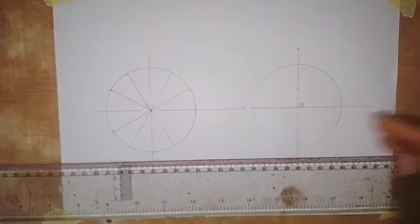So we are dividing this circle into 12 equal parts as we have here. Then we are not dividing the other one into 12 equal parts, you'll see what I'm going to do here.

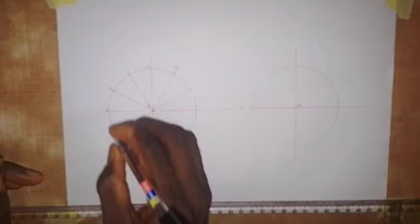First of all, we have point B at this point, so I'm going to call it point B, and then point 1. So this is B1, and this is 2, this is 3. Let's say this is going in anti-clockwise direction. So this is 4, 5, 6, 7, 8, then 9, 10, 11, and 12.

As we are told that the two circles rotate in opposite directions, one is going clockwise and one is going anti-clockwise. So this one is going anti-clockwise, while this one will be going clockwise. That's what we are going to do.

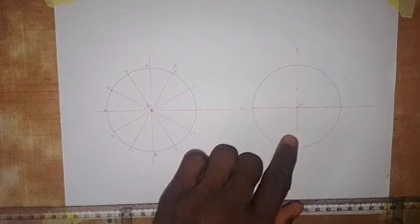As we have located point B here on circle center A, we need to locate point C on this circle center D. But we are told in the question that the length of the connecting rod BC is 130 millimeters.

So to locate point C, we take a measurement of 130 millimeters with the compass, stretching it to this point here. So here we have 130 millimeters. I'm going to put the pinpoint of the compass at point B, or point 1, then make an arc on this circle center D. We keep this 130 millimeter setting, as we are still going to make use of it. So here we have this point to be point C, or C1.

Alright, so we have this now. We are going to draw the connecting rod just to connect B and C together. So we connect B1, C1 together. That is going to give us the connecting rod.

So we draw a line from here to here. This is the connecting rod. Then we are going to make line AB1 a thick line. Then this line CD, this C1, we make it a thick line like this.

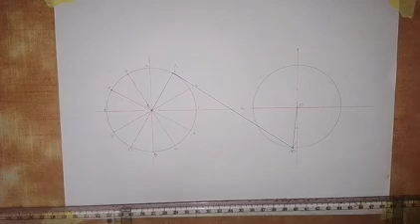So we have this, and as the question says, point P, whose locus we are to plot or draw, is 25 millimeters away from point C. So to locate point P1, we take a measurement of 25 millimeters. From here to here, this is the first 25 millimeters. So here we have this point. This is point P now. So I'm going to write P here.

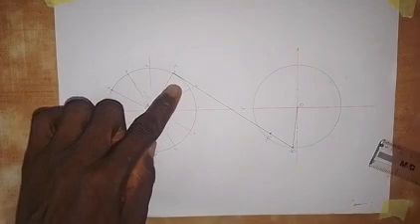The next thing we are going to do is that as this one is going anti-clockwise, while this is going clockwise, we have to go in this direction. So what we need to do is take that 130 millimeters, as I said, and put it at point 2 here. That is point B2.

Then I'll make an arc here on this circle. So this is another point C, the second point C. So what we are going to do now is draw a line from this point to point 2. So we join them together like this.

Then I will take a measurement of 25 millimeters from this second point C here. So 25 millimeters from here, so then we have this point. When you are doing this kind of work, take your time. It's not something you can rush. You can't draw all the lines and then get the point - that is not going to work. So you take it and do it one by one. This is the second point P now.

Next, with the same 130 on the compass, we put it here at point 3, then make an arc on this circle. This is another point that we have here. We have to join this point together with point 3, so that we can locate the third point P. We join this together like this.

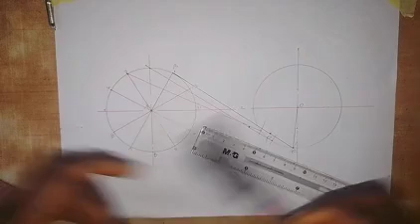So then I'm going to take a measurement of 25 millimeters from this point C on this line, so we have this point. This is another point P here. I'm not going to keep writing C and P, so just try to follow what I'm saying here.

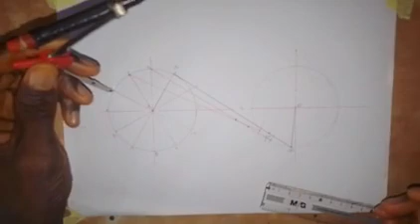The next one, with the same 130 millimeters, we put it on point 4, and then we make an arc here. This is another point C here. So we just need to join these two points together like this.

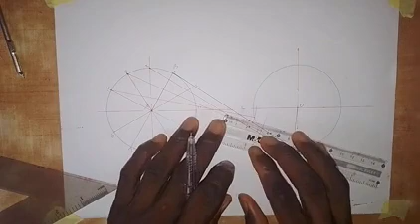And then we take a measurement of 25 millimeters from this point C here to get another point P on the connecting rod. So we have this point - this is another point P here. We just need to make sure we can see it.

With the same 130 millimeters at point 5, we put it at 5 here, and then we have this point, exactly on this point, because we have this point here. So all we need to do on this line is take 25 millimeters from this point to this side. So if I take the measurement, this is 25 millimeters here, so we have this point. We don't have to draw a line since we've already drawn one from here to point 5.

So then for 6, we put the point here at 6 with the same 130 millimeters, and make an arc on this circle. This is another point C that we have here. We connect it together with point C at point 6, drawing from here to here. Then from this point C, we take a measurement of 25 millimeters to locate another point P. So we have this point - this is another point P here.

Don't forget that this one is rotating anti-clockwise while this is going clockwise.

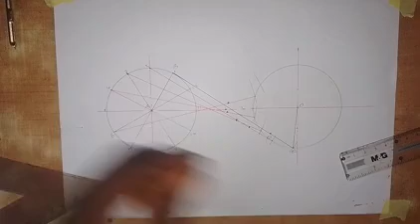So that is what we are doing. Okay, so we have another point P here as we have done it. So we take the same 130 millimeters again, put it at 7, and make an arc here on this circle. Then we draw a line from this point to 7, like this.

So now we take a measurement of 25 millimeters from this point C to this point. So this is another point P here.

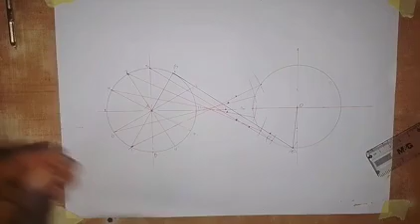Then with the same 130 millimeters at 8, we make an arc here on the circle. So this is another point C that we have to join together with point 8, or B8. So we draw a line from here to here. So we have this point.

So we are going to take a measurement of 25 millimeters from this point on the line, so we have it here at this point. So here we have another point P here.

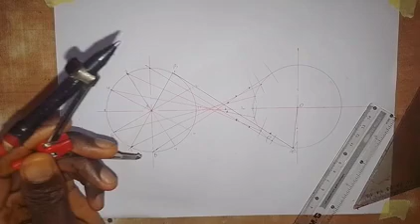Okay, so we are getting closer to the last part. So here we have 9. Then we make an arc with the same 130 here on this circle. So we draw a line from this point to point 9, from here.

So you have to take your time to do this. You cannot rush it as I'm doing it here.

So then from this point, this is a new point C. We have to take a measurement of 25 millimeters from that point C down. So here we have 25 millimeters here on this line. So we have this point, this is the point here.

Okay, so next with the same 130, we put it at 10 here. Then we make an arc on the circle. So here we have the point here on this circle. So then we are going to join this point together with this point here, with B10, so we have this line drawn.

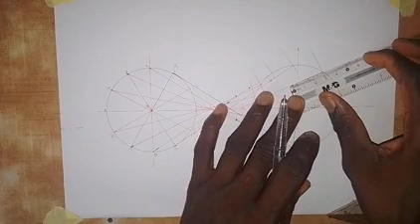That's the connecting rod. Then from this point C here, we take a measurement of 25 millimeters to locate the new point P. So that is the point here, we have this point here as the new point P.

So with the same 130 millimeters, you put at 11, and then make an arc here. Okay, so it will touch somewhere around here. So that's what we have there. So we are going to draw a line from this point here to 11, like this, and we have to take a measurement.

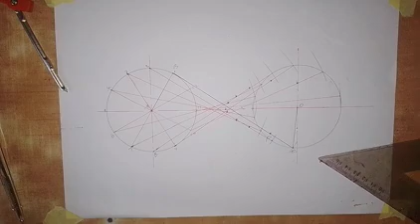Of 25 millimeters from this point on the line. So then we have this point. So this is a new point P here on the connecting rod.

Then lastly for 12, so we put at this point 12 here, and then we make an arc here on the circle. So this is a new point C here. So we have to join this point C with point 12. We draw a line from here to here, and then we take a measurement of 25 millimeters.

So we have this point. Okay, so this is the new point P here. So we have all the points that we have to join together.

Okay, so this is the first one that we got, this is the next one. So we are going to join this together with the use of a French curve. Let's look at how it can be done. So I'm going to join these 3 points together, we have these 3 points here. So then we join this together with this, and then we can join these 2 points together like this. Alright, so we have this.

So next, we are going to have these points that we have to join. So we have these 2 points, we join this together and then connect it with this. Then we connect these 2 points together like this. Then we can connect these 2 points together, and for this we connect these 2 points together like this. So we go on connecting these 2 points, connecting them together like this.